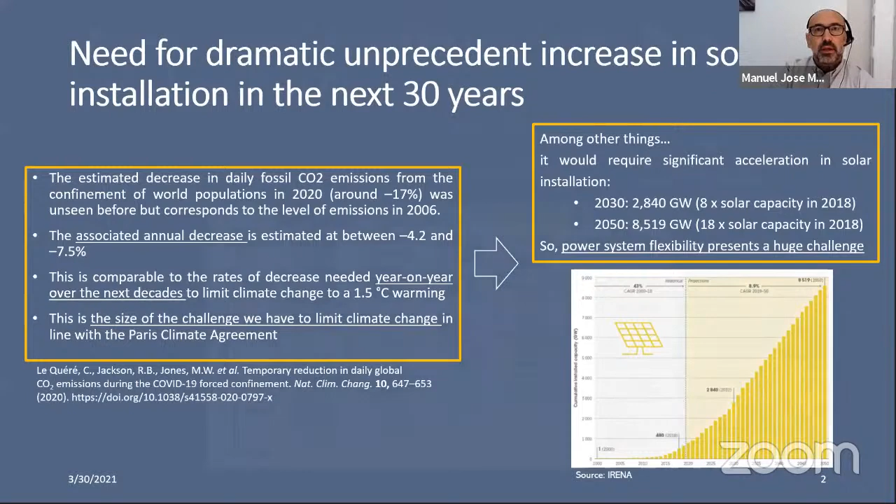And so the challenge that we have now in power systems to provide flexible tools is just unprecedented. So we need to be innovative. We need to be very, very creative if we really want to achieve this challenge, right? A power system needs to be very flexible now. And this is not only a matter of power system operation. We cannot put all the burden on the system operator. We cannot put all the burden on the planning.

So we need to do flexible generation. We need to solve this situation also from the generation point of view. It's very easy now to install cheap PV, cheap photovoltaics at 1 cent. It's very nice to show these records about building PV at 1 cent, but this is unsustainable, right? We need to think ahead, and we need to do flexible generation.

And we have a lot of tools. This is from the International Energy Agency. We need to provide flexibility from variable renewable energy, VRE. We need to do advanced plant design, and we also need in parallel to install battery storage and medium-term storage. So we need all sorts of tools to provide that flexibility to the grid, in parallel with demand-side response, regulation and markets, and modernization of our grids. There are a lot of things we need to do in parallel, but one of them is to promote flexible generation.

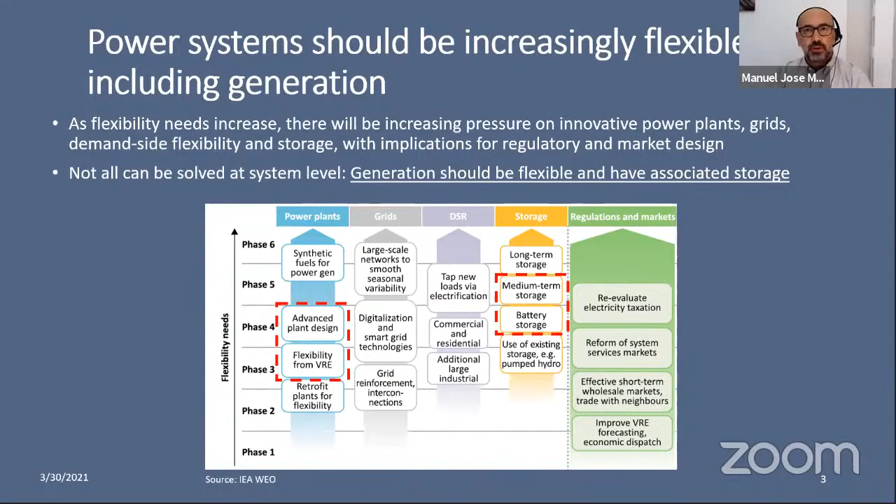So this is a shift. We need a shift in the conception of renewable deployment. It's not anymore the sustainability of the investment. We need to look into the sustainability of the system as a whole. We cannot only look to have very cheap renewables without looking at the system level, because in the end that will put a burden on the system. It is more a cost-value proposition for the system rather than simple cost, right?

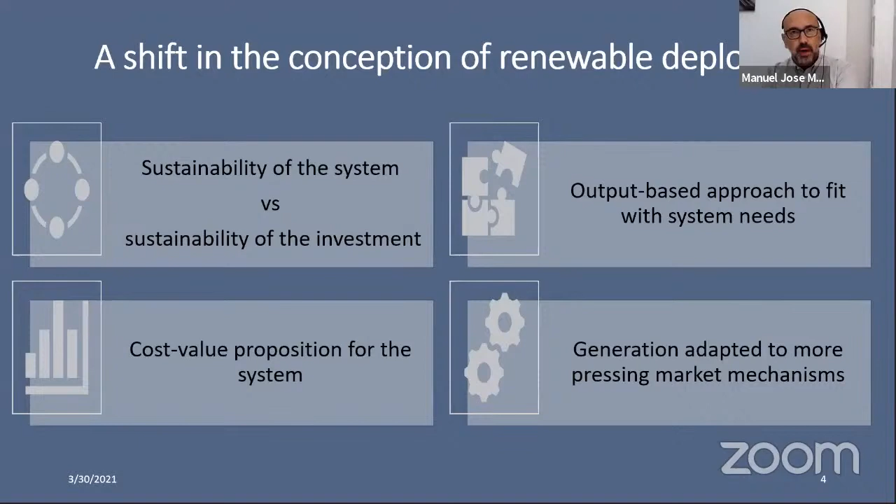So an output-based approach that needs to fit system needs. I think most countries are now shifting to that conception of output-based approach, like for example Morocco, which Rahim will present later. That's what the system needs. The market needs to provide me what I need for my system, not whatever, and I will adapt my market to that. So generation needs to be adapted to market mechanisms and the need for flexibility.

They need to be able to supply peak demand times, because normally these are evening times in most countries. They need to be planned, fitting with long-term planning nationally or regionally. They need to follow the output-based approach. Again, the plan should give us what we need, not whatever. It should be consistent with the long-term sustainability of the system.

Again, it should be affordable, of course, so it needs to follow international practice of procurement, a transparent process, and risk needs to be mitigated in order to attract private investment and international competition, and it should be sustainable from a local point of view. It needs to develop local capacity, and it needs to be optimized for operation and maintenance.

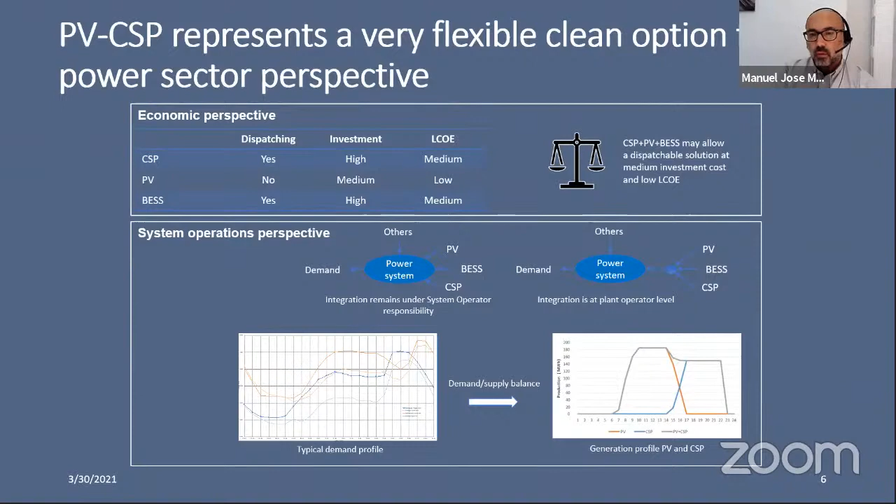Now I put here these two charts. In the left approach, let's put everything into the power system and let the system operator deal with all of that, right? I think we are now shifting towards an approach more similar to the right one, which is let's give the power system what it needs and remove that burden, because the challenge in front of us is so huge that we cannot just put megawatts in without any planning, right? And we have to attend to the demand-supply balance.

So summarizing and trying to respond to the title of this webinar, PV-CSP may accelerate the transition to renewables with a solution that has these four features: it offers total flexibility for facing this very challenging solar expansion, it reduces pressure on system operation, it simplifies and cuts down the prices of installation and O&M, because you are optimizing the investment by sharing many of the facilities, and it increases the value proposition of solar energy. It's not only cost; it's also value for your power system.

And with this, I think I did it in less than the time I was requested. You did, Manuel. That was really quick, but also really interesting. You went into a lot of detail, so thank you very much.

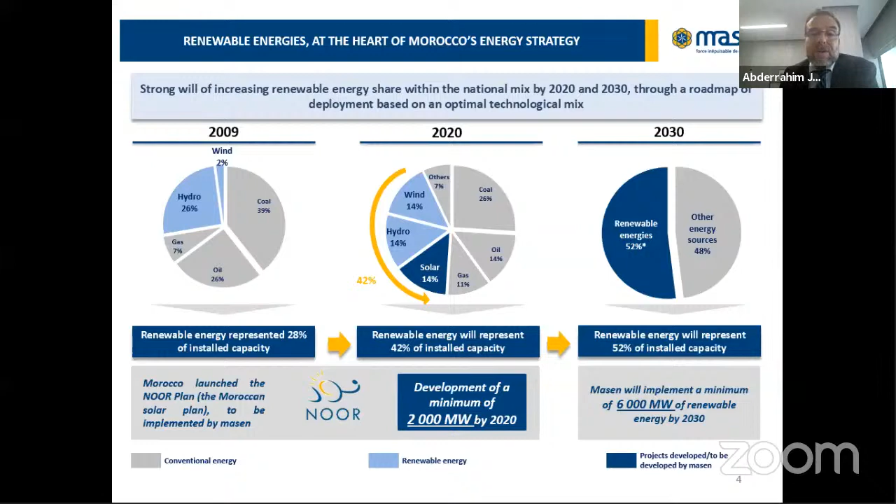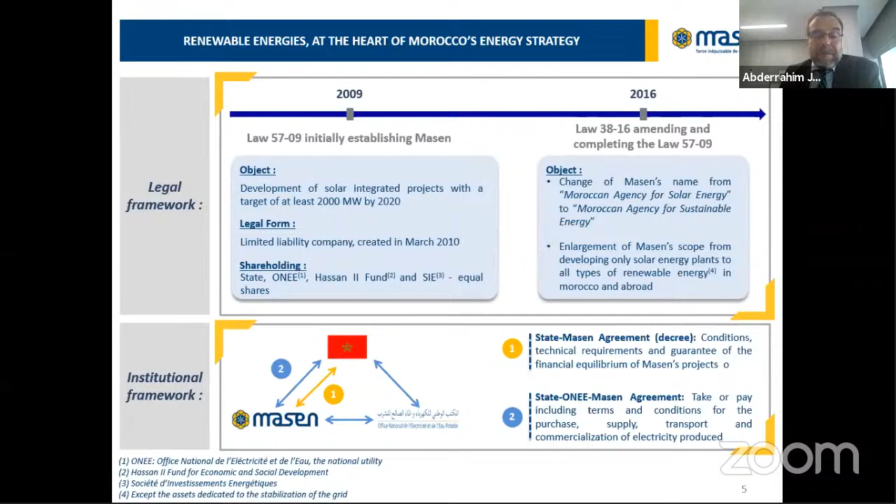In order to develop the renewables in Morocco, Masen was created by law with a clear framework. I think that a lot of people know about it, and you will have the presentation, so I will not spend a lot of time presenting it. There are agreements between the government, the utility, and Masen in order to develop the projects in a clear manner.

That's our first solar complex, which is under operation. The Ouarzazate Noor complex, with its 4 power plants and an R&D platform. 3 are CSP power plants, Noor 1 and Noor 2 parabolic trough, and Noor 3 tower power plant. All the power plants are under operation now.

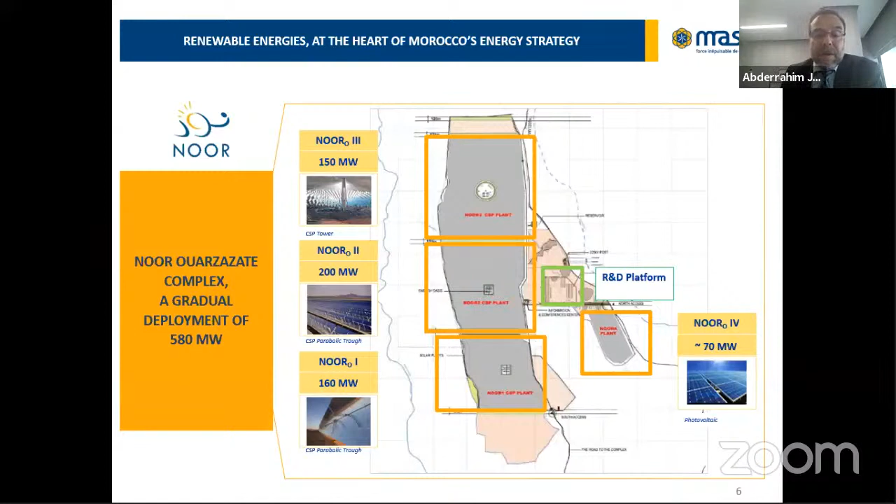And now, what about our subject? What is going on in the electrical system? I'm taking the example of Morocco, but I think that it can be the case of a lot of countries. What are we doing now? In reality, we are really pushing PV and wind into a grid that has been constructed during the last century.

This manner to generate electricity during the last century was based on fossil fuels, and it means that in front of demand that is variable, you have generation that is stable. You can generate when you want using gas turbines or steam turbines or anything else, using coal, nuclear, gas, or fuel oil to generate electricity.

It is clear that we can push, but until a limit. We cannot continue to push renewables inside such a system anyway. And at the moment, the technical limits of the existing fossil fuel power plants will push us to stop developing renewables or to stop the fossil fuel power plants, and we will have to choose.

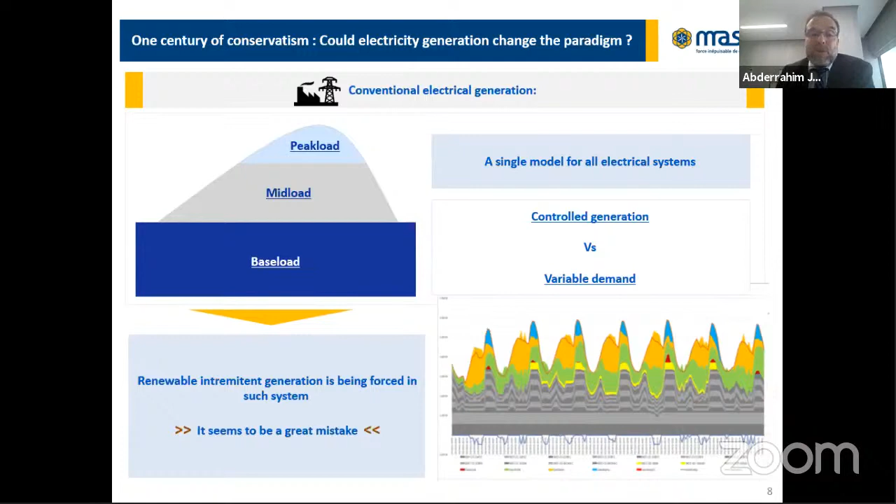We analyzed in Morocco what we can do with just PV and wind. It is intermittent renewables, it is intermittent energy, which means that we are just giving energy, we are not guaranteeing any capacity. And with a good mix on a regional basis and technology basis, we could reach 80 or more than 80% of what we call useful energy,

which means that if you are producing 100% of the needs, 80% will correspond to demand, while 20% should be curtailed, and of course 20% of demand will need other means to be satisfied. If we continue to use fossil fuels just for 20%, I don't think that any nuclear power plant or any coal power plant could compete.

20% capacity factor is so low for such power plants that it is not possible to compete. So if we choose to develop PV and wind, we will have to find other solutions in order to satisfy the whole demand while maximizing renewables in the grid, with the lowest cost, which is now PV and wind.

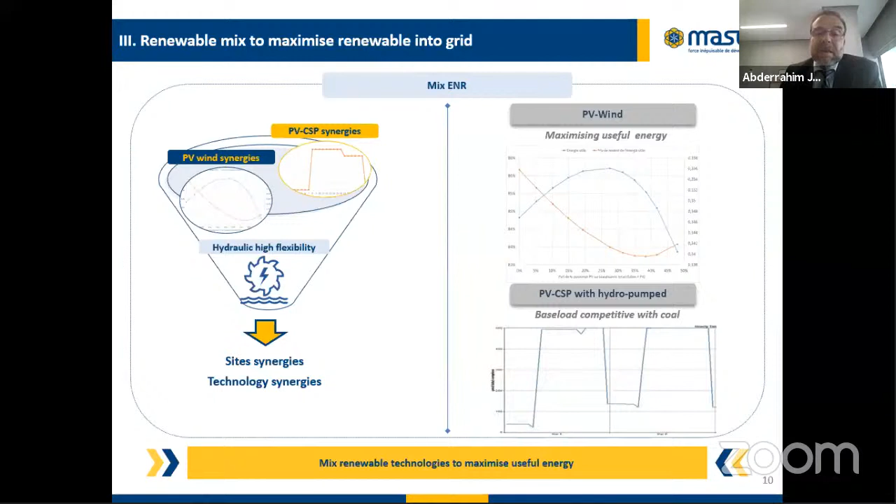So the first thing is what I explained. It is the synergies between the technologies and sites, which allow us to reach a high useful energy. And then we will need storage. And when we talk about storage, which is the best solution from our side, 20% of needs is very low, but with storage we can respond to it.

During our study, we could see that we need a lot of different storage technologies, because you will need to manage the hourly intermittency. You can have wind that disappears for, let's say, 5 minutes or 10 minutes, and you will have to respond to such demand.

And for this, we think that the battery is the best solution now. Now you can need just storage to respond to peak demand, which can be 3, 4, or 5 hours. And for this, battery can be the solution from our point of view if you need it for not a lot of time, let's say 2, 3 hours now. Yeah, battery can compete, but more than this, until now, battery cannot compete.

And you can use hydro pumped storage if you have the sites to receive hydro pumped solutions, or thermal storage. And when we talk about thermal storage, that means that it is CSP. Moreover, if we need more than 5 hours, because hydro pumped storage is really competitive when you are using it between 4 and 6 hours of storage, taking into account our simulations.

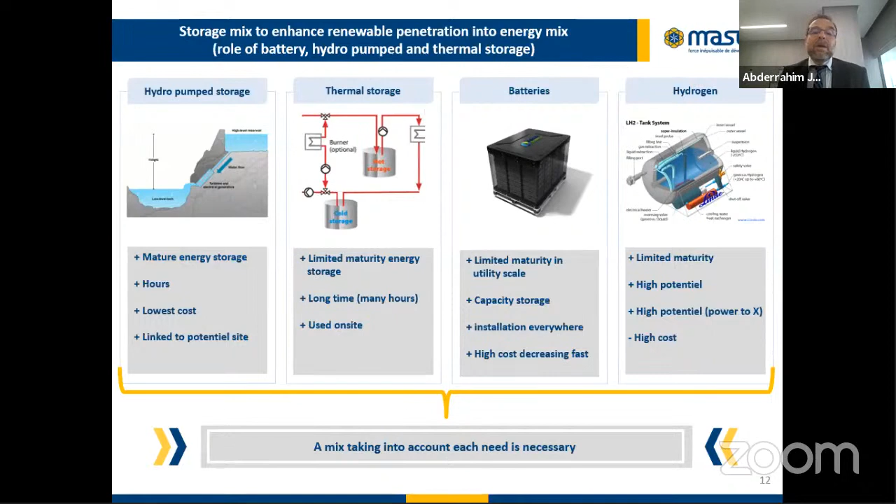Of course, if for one need, two technologies are in competition and one is better, we will choose this one. But until now, we think that for storage, there is a lot of synergies between the four solutions we know now. I'm sure that we will have other solutions developed during the next years, and they will come to compete with these. But at least now, the four technologies that are mature enough are these and could respond to demand. At the same time, PV, wind, and hydro will allow us to give the maximum of energy.

What was the Midelt project? The Midelt project was constructed under these conclusions, because when we launched Midelt in 2015, I think, battery storage was at $500 per kilowatt hour, which meant that it was not competitive and could not compete with thermal storage. And for hydro pumped storage in Morocco, you have great potential, but you need at least 8 years to develop a hydro pumped storage. So Midelt was the best solution.

We are using PV during day and CSP during night, thanks to thermal storage. And the costs that we could reach are very, very interesting. It is a plant that will be generating from 7 in the morning until midnight, which means that it is replacing a CCGT power plant, and the reached cost in our region, with gas at $7 per million BTU, will be lower than the cost of fuel only, not the cost of the electricity.

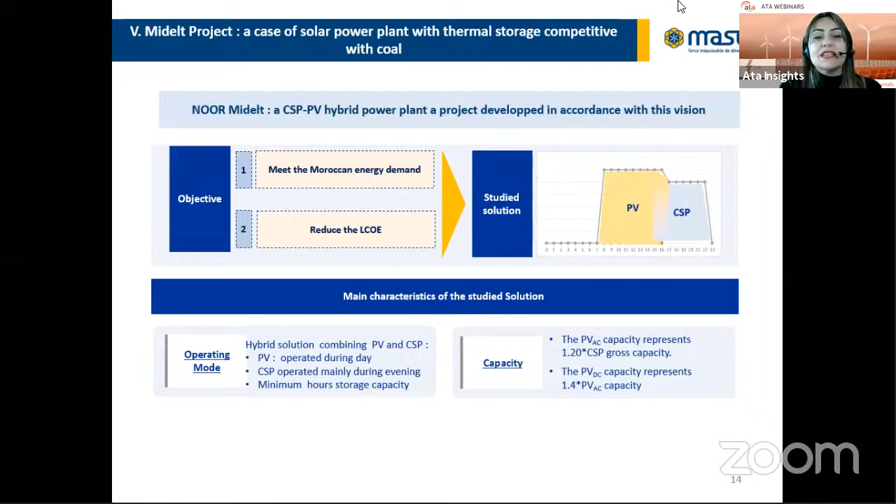Perfect. Okay, we can see you. Can we hear you, Oliver? I hope so. Yes, perfect. Right ahead. Thank you. Thank you for these two interesting presentations.

I want now to add on EPC contractors and technology providers' view on the hybrid topic, and to share with you where we see this technology being today and where potential future deployments can head to.

For all those who do not yet know TSK, we are an EPC and technology provision company with a long track record, almost 4 decades, with 1,000 people, an interesting balance sheet, active worldwide, and not only in CSP, but also in other renewable energies, in conventional energies, and many other parts of the industry.

When it comes to CSP technology, we can show up with a significant market share today. Out of approximately 6 installed gigawatts worldwide, we have been significantly involved in more than 1 gigawatt, and that makes us certainly one of the leading companies in this sector.

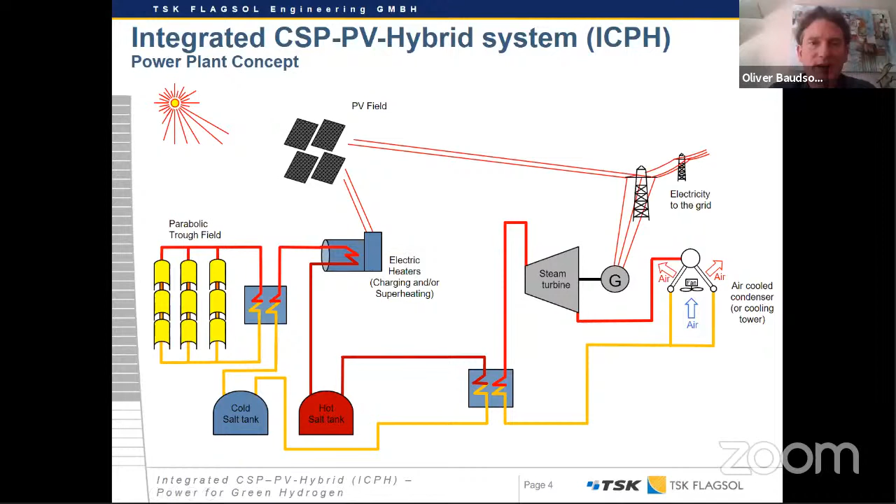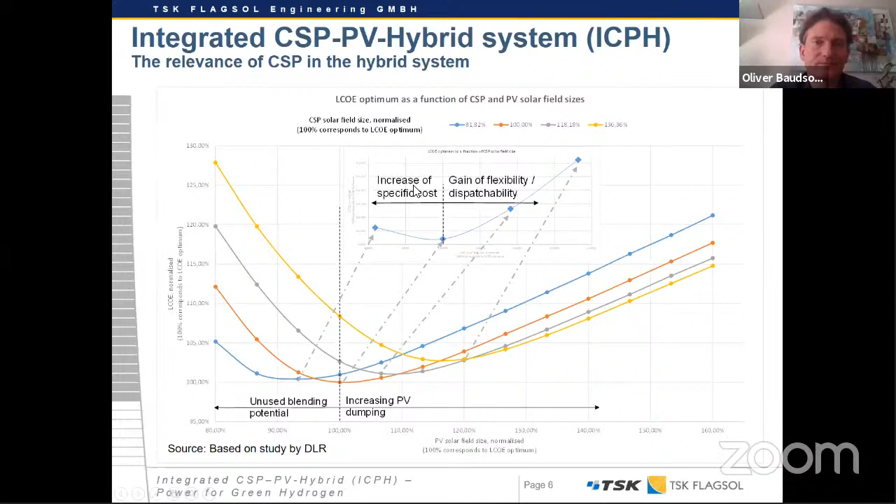So one of the most popular and upcoming applications for CSP in our view is the hydrogen industry. This is a very famous topic, not only in Germany and in Europe, but also all over the world. And we believe that particularly the CSP-based PV hybrid systems have a perfect fit to run into that industry to serve this power plant technology.

And first of all, we have to state that we need to allocate to each new capacity of hydrogen generation a directly allocated green energy source. If you don't do so, we will deprive each and any system of renewable energies, and we would work against any energy transition. So, if we have to add one, we should, of course, add a reliable system at attractive cost. And we believe that an ICPH system, an integrated CSP-PV hybrid system, can do so.

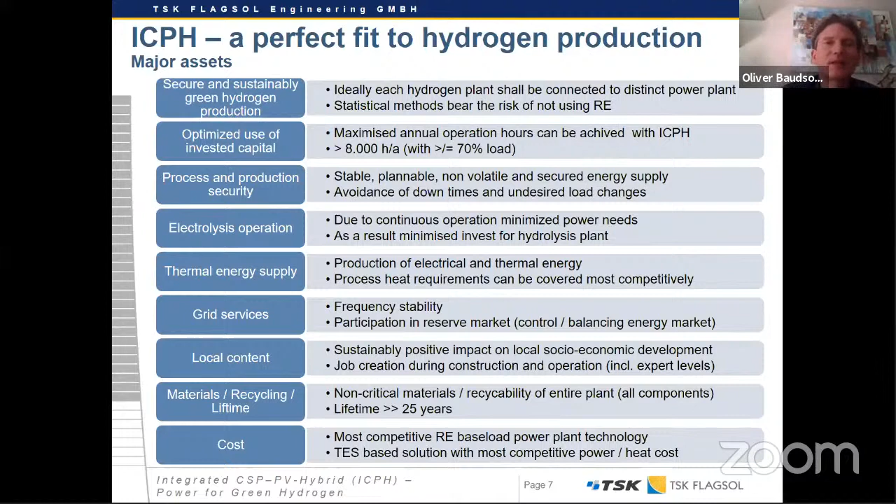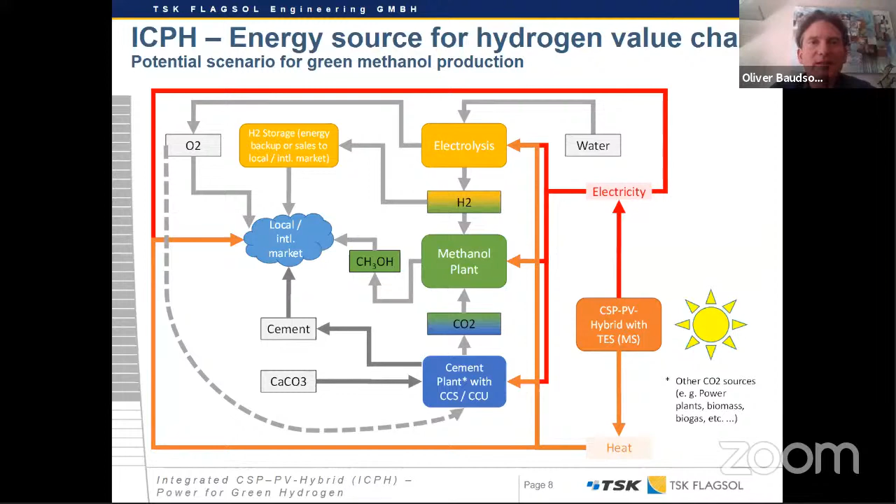We capture here the CO2 and send the hydrogen and the carbon dioxide to a methanol plant to produce e-fuels, which can then be sold to the local market. Just as an example of how ICPH concepts can be deeply integrated into industry. And now I want to finalize with a future outlook of what can also be possible in future times based on integrated CSP-PV hybrid systems.

You all have certainly heard about virtual power plants, where you have a kind of pooling of different power plants acting as a whole, a virtual power plant. And this technology can also be used in such a context on grid level. So that means the hybridization in future times can be done on grid level.